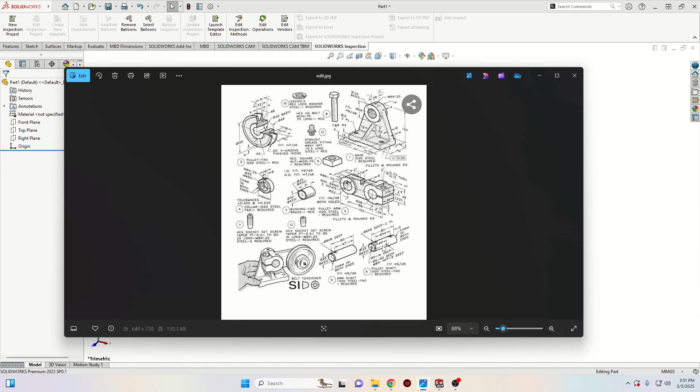Okay, so we'll have to open a new part and then open a sketch in the front plane. And here we'll make the next sketch. Select circle, we'll make one, select smart dimension, and let's define this. The diameter will be 25.

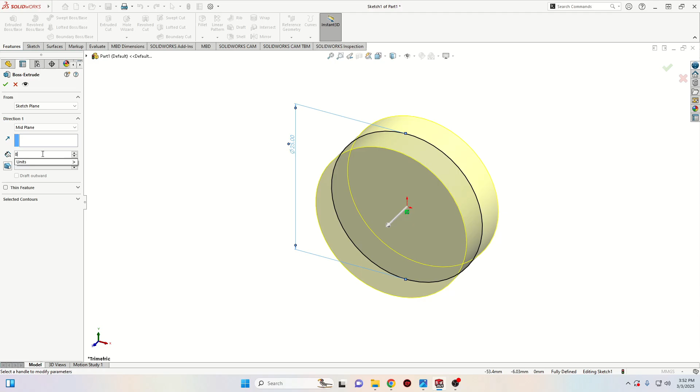And now go to features and use extruded boss base command. Here instead of blind we'll keep mid plane, and here the dimension will be 80 millimeters. Press here OK. Now we'll have to add some chamfers on both ends.

So go up here, select chamfer. You can select this face, and here we'll select this one, dimensions, and here we'll keep symmetric and the dimension will be 1 millimeter. Press here OK.

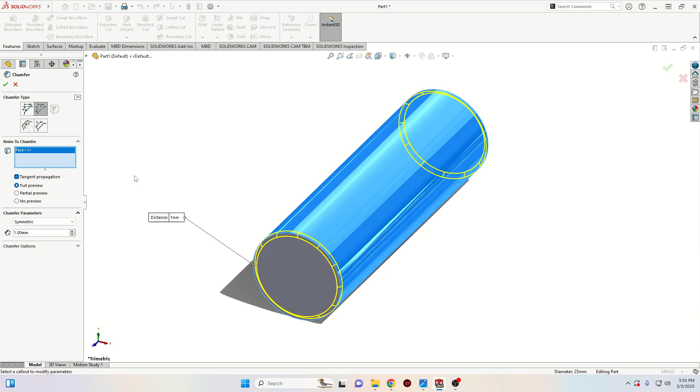And now select hole wizard. We'll have to make 4 holes for this shaft. Select here this one and here this, and then we'll select here tap drills, and the first hole will be M8 with the pitch 1. In this hole will be going the grease nipple.

And now go to positions. Actually first let's change here the end condition. Will not be through all, will be blind, and here will be 50 millimeters. Alright, and now we're gonna leave it like this. Make sure that this is not checked here.

Okay, and go to positions, 3D sketch. Let's place it on this face. Now we have to make sure that this is fully defined. First let's try like this. Select this point with this center point, and let's see if we can make them along Z axis, and this should fully define it. Now it's black, which means it's good.

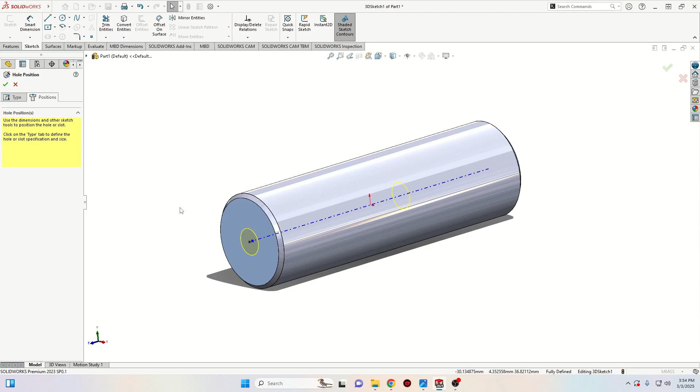Press OK. And now we have the first hole, and now let's make the thread for this hole. So we'll go back to hole wizard, select thread, press OK. The thread location will be this edge, and now let's select, here will be blind, the distance will be 8 millimeters. Okay, and now here we'll keep M8 and the pitch will be 1.

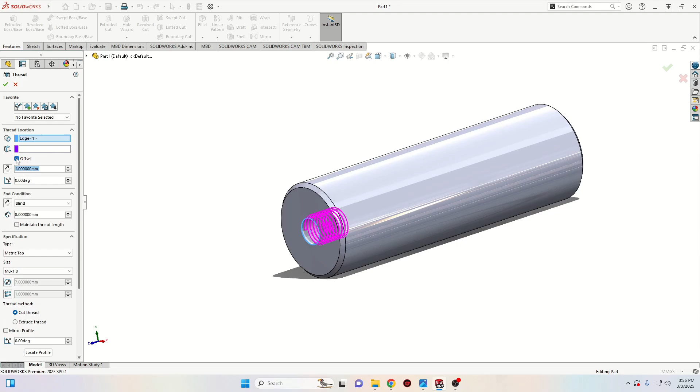Now let's select here an offset. So select here offset. We'll select here 1 millimeter. We'll change here the direction of the offset. We want it to be outside of this face. And I'll have to change here from 8 to 9.

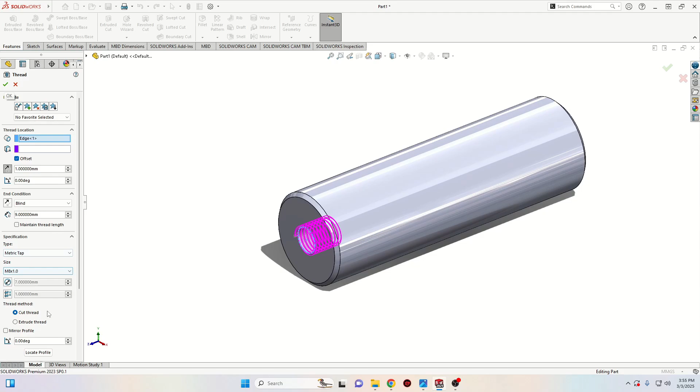And now we have 8 millimeters of thread inside this shaft. And let's press here OK. This should be all the settings. Yes, that's good. Press here OK.

Okay, and now let's select hole wizard again, and this time we'll select also this right here, but here will be drill size, and let's select here the size will be 8. So scroll down until you'll find 8 millimeters in diameter. And now here we'll also keep blind, but this time the depth will be 5 millimeters.

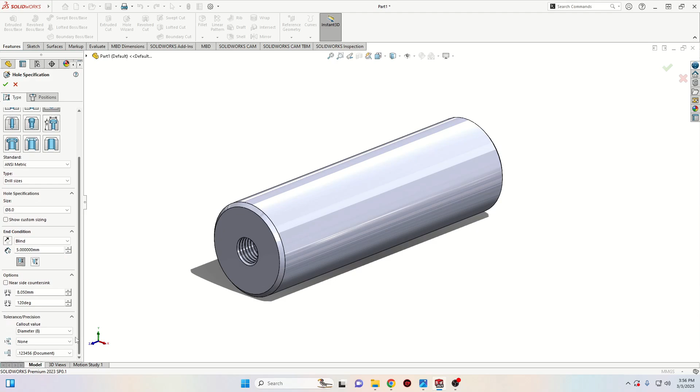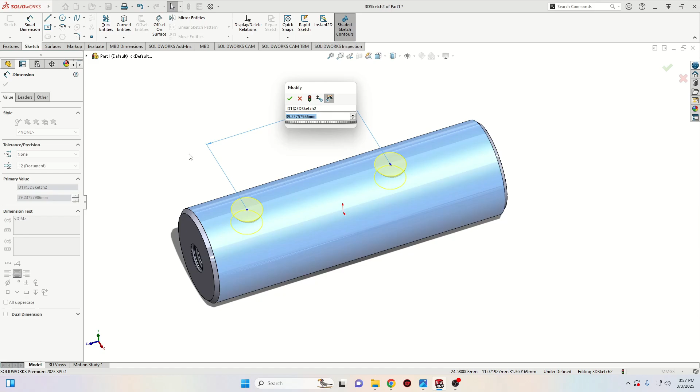Go to positions, select here 3D sketch, and this time we'll have to place 2 of them like this. And now let's define them. We'll have to give some dimensions. So select smart dimension and let's give a dimension in between these two. Here will be 54 millimeters. Okay.

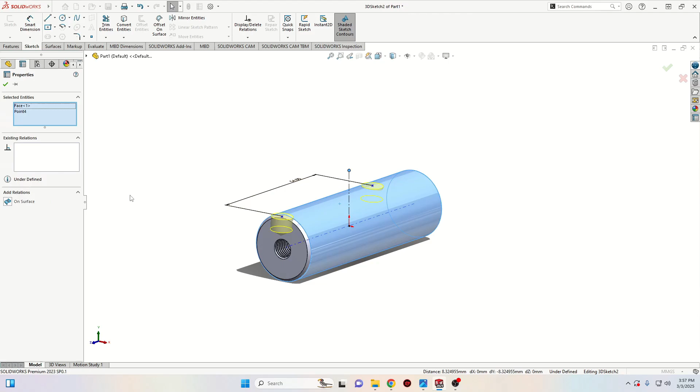Let's make sure that these two are in line. So select both of them and select here along Z-axis. Press here OK. And now let's try to give another dimension, and let's select center line. Let's make a center line going up like this, and then select this point with this face and select here on the left on surface.

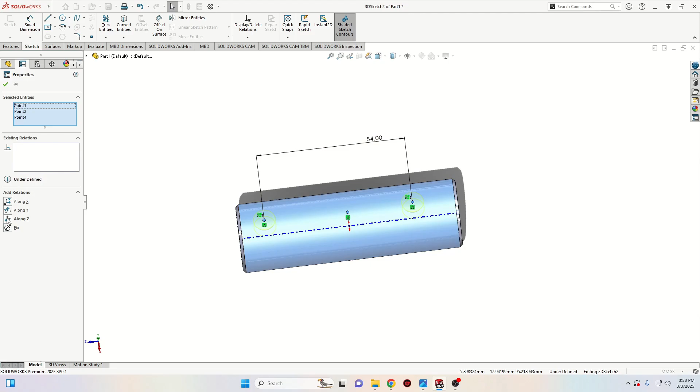And now all of these 3 points should be on the same direction, on the same line or not. If they are not, let's select them all, only the points, and select here make along Z-axis. Okay, that's better. And now it's smart dimension. Let's give a dimension from this point to this one, and here should be half of this dimension, so 27.

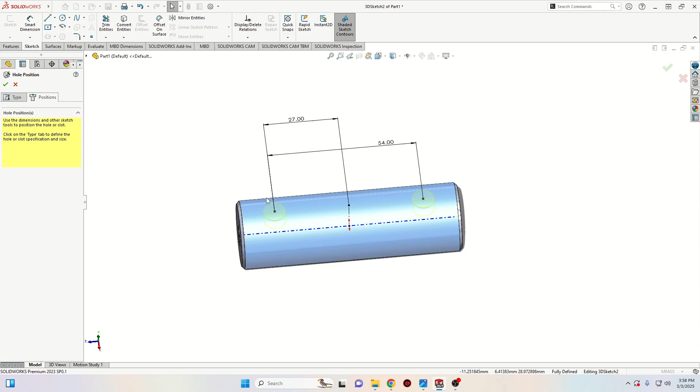Okay, and now this should be it. Press here OK. And I'll have to make one more hole, which will be somewhere on this side. So select hole wizard again. We're gonna use also this.

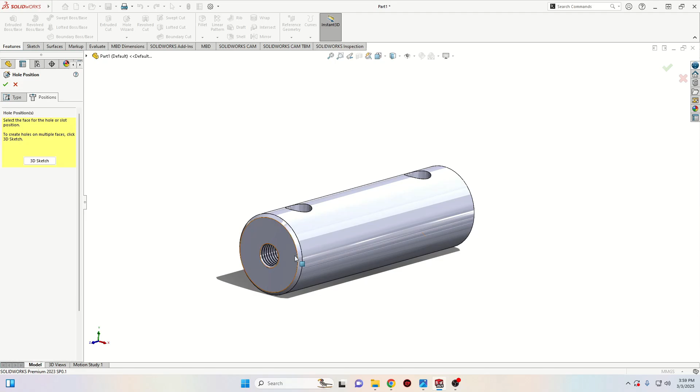We'll keep all of them like this, and here we'll have to change the diameter, and this time will be 5 millimeters. Let's go and find 5. Perfect. Everything else will be the same. Go to position and select here 3D sketch. Let's place it like this.

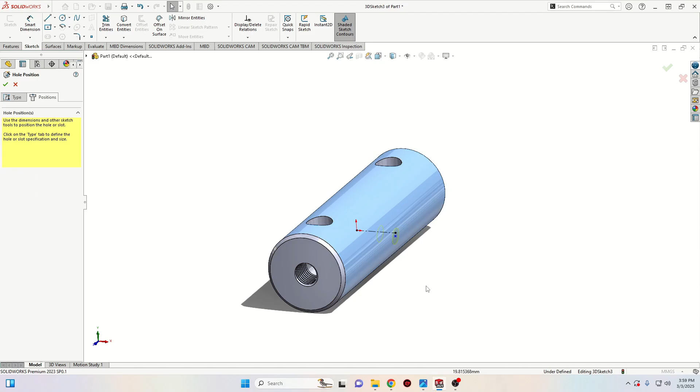And now let's make another center line. And we'll start another center line like this. Make it along X-axis this time. Select this point with this face and select again on surface. On the drawing we see that this hole should be at 40 millimeters from this face. This whole shaft has 80 millimeters, so it means that it's in the middle.

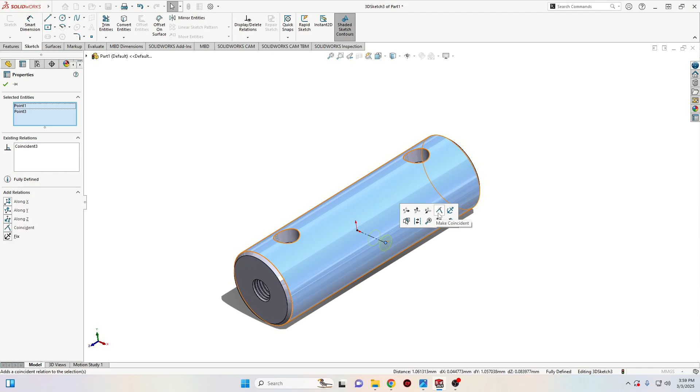Okay, if we know that, we can select this point with this point and select here coincident. And now the depth for this, let's go back here to type. We forgot to change the depth, should be 14 millimeters. That's good, and press OK. This hole is for lubrication, so it's good. Nice, and this is everything for this shaft.

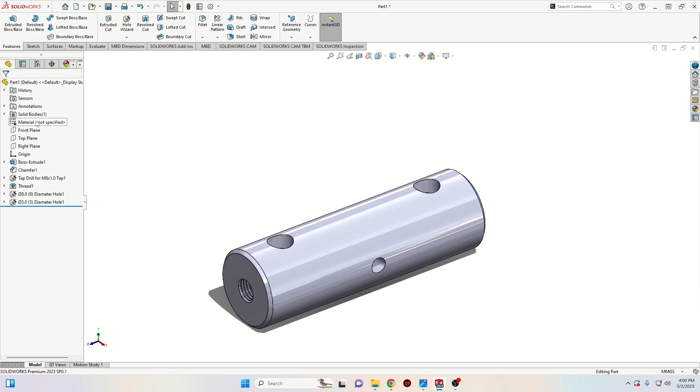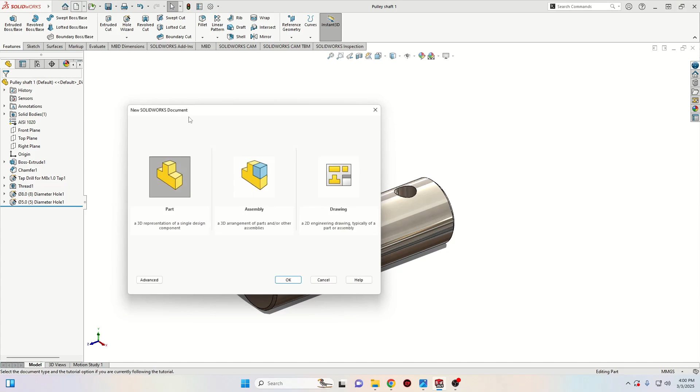Let's apply the material. It will be edit material. It will be steel 1020. Apply and close. Now let's save this. This will be the pulley shaft. Okay, now let's open a new part and let's make the next shaft, which will be the arm shaft. This one will be a little bit faster because it doesn't have so many holes.

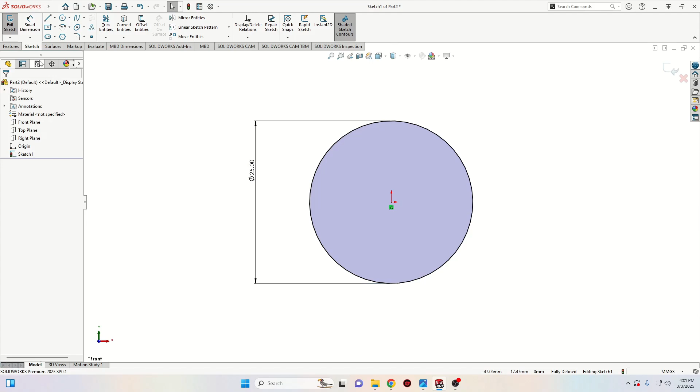Let's open again a sketch in the front plane, select circle. It will be the exact same dimensions as the other one, 25. Let's go features, extruded boss base, also mid plane, and here will be the same, 80. Press here OK. And now again a chamfer, dimension, symmetric, 1, press OK. Let's apply the material. Apply, close. Okay, and now we'll have to make only one hole for this one.

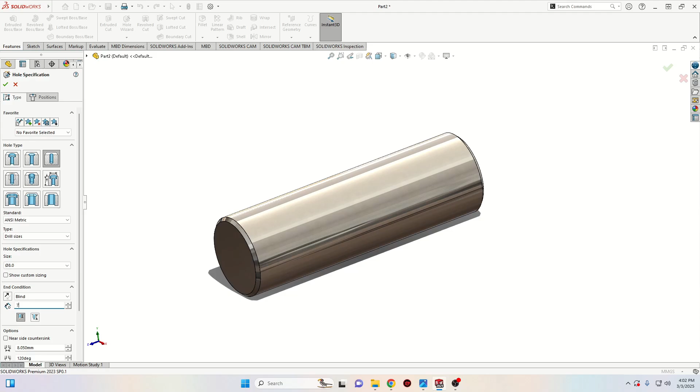So go to hole wizard. We'll keep the same settings right here, and we'll have to change here from diameter 6 to 8. 8. And the depth will be also 8. Go to positions, 3D sketch. We'll have to place it right here. And now let's make a center line. So select center line, make it like this along y-axis. Select this point with this face, select here on surface. Make these two along z-axis.

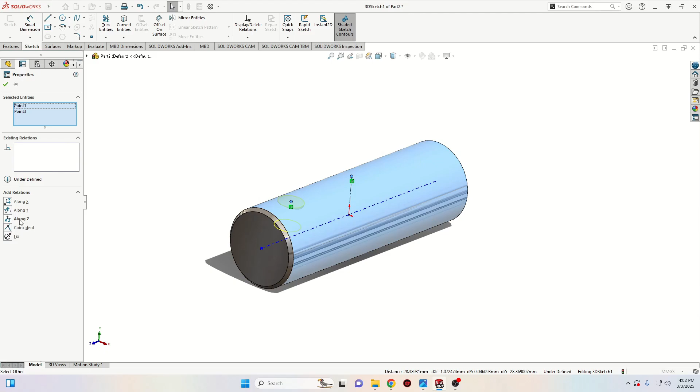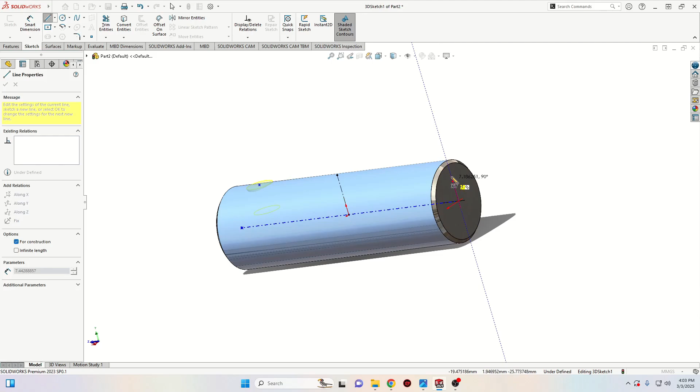Okay, and now with smart dimension, I'll have to give a dimension which will be from this. Let's see if it's working. We have a dimension from this point to this face, to this end right here. Is not working. Okay, if we want to give this dimension according to the drawing, we can try to make a center line right here, and then select this point with this face and select again on surface, and we can give the dimension this time in between these 2 points, and it will be 67.

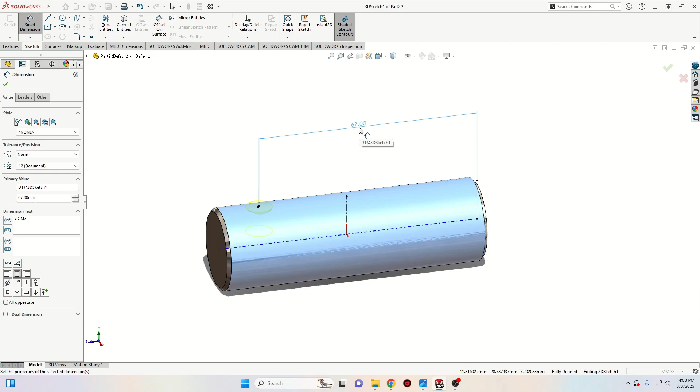Or we know that from this face to this center line is 40 millimeters, so we can add the extra millimeters to make it 67, which is 27, right? So we can give a dimension from this point to this point, 27. It will be the same. Nice, and now press here OK. And this is everything for this shaft. Let's go ahead and save it. This will be the arm shaft.

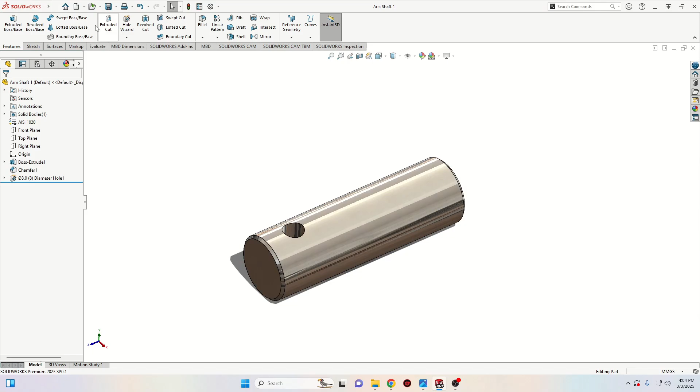Save. And I'll have to make the last 2 parts. So let's open a new part. All of these are very, very easy. Let's open a sketch in the front plane, and here we'll make 2 circles. And now with smart dimension, let's define them. This one will have the diameter 44.

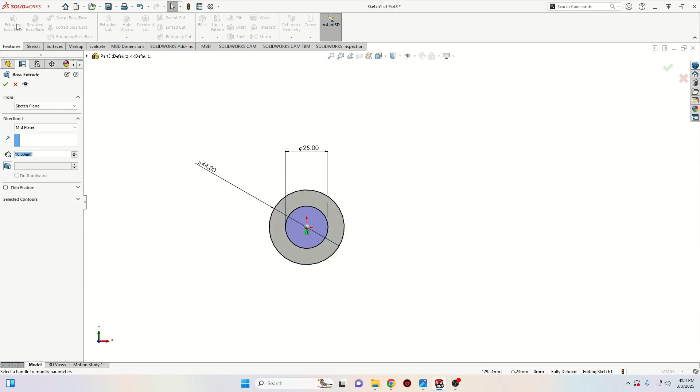This one will have the diameter 25. Go to features, use the extruded boss base command. We'll keep mid plane here, and this will be 16 millimeters. Press OK.

I'll have to apply a chamfer for this one also. So go to chamfer, select this face, select this, and set it to 1 millimeter. Press OK.

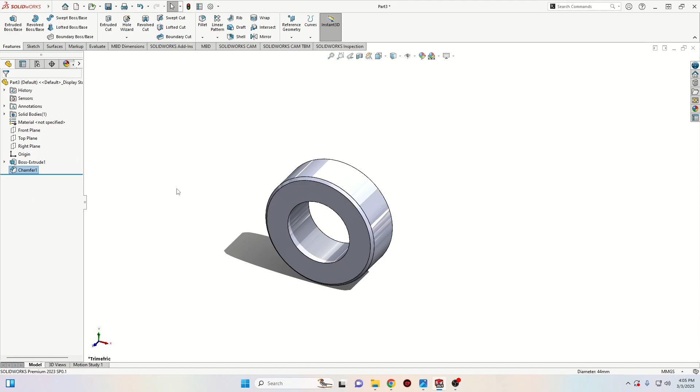Now I'll have to make a hole, so go back to hole wizard. We'll keep this one - the hole will be M8 with pitch 1.25. We'll have to change here to tap drill, and find M8 with pitch 1.25.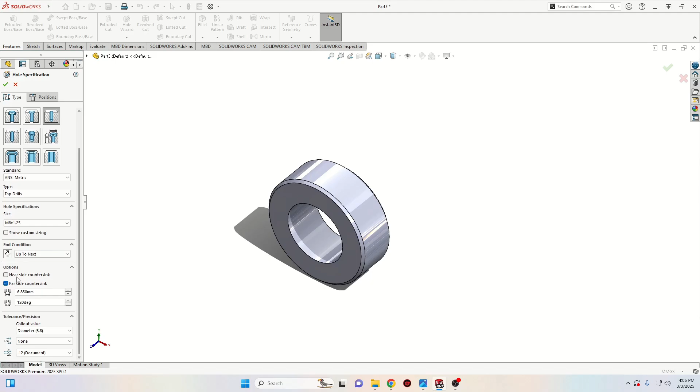Go to positions - actually, first let's change the condition here. We'll change from blind to up to next, and let's uncheck this. Now go to positions, 3D sketch, let's place it like this.

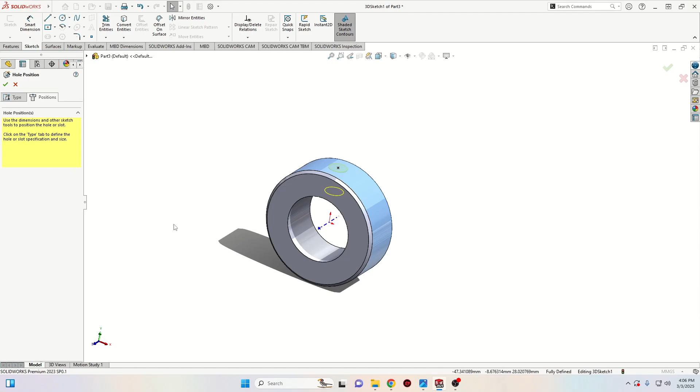On the drawing it's at 8 millimeters from this face right here, which means it's in the middle because this whole part has 16 millimeters. Let's see if we can select this point with this one and make them align along the y-axis - and it's working. Now this is fully defined.

Go here and select OK. Now let's apply also the material for this. This will be steel 1020. Apply and close.

Now this is it for this part. Let's save it.

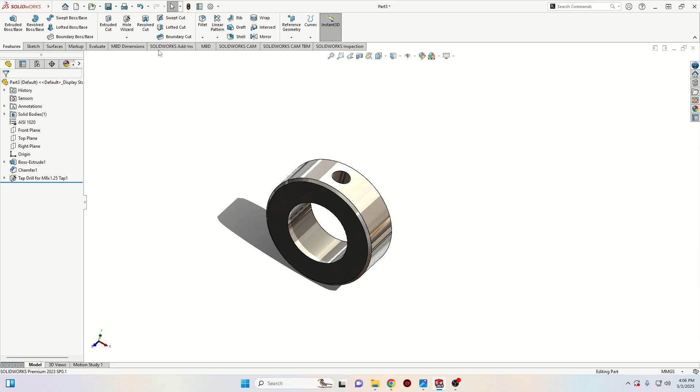Let's make the last part, which is the bushing. We'll have to open a new part, plain white. Open a sketch in the front plane, and again it will be the same two circles.

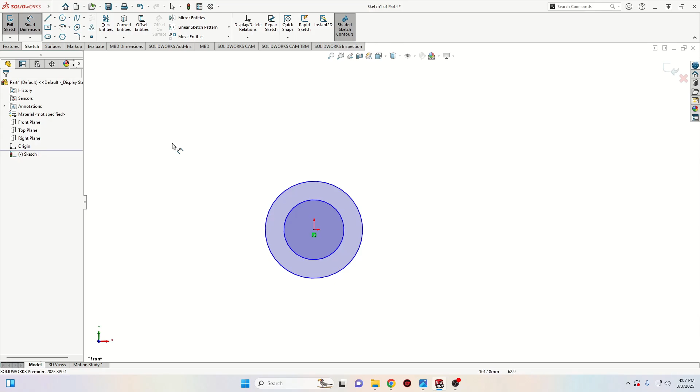This time we'll have other dimensions, at least this one. This one will be 30 millimeters, and this one will be 25.

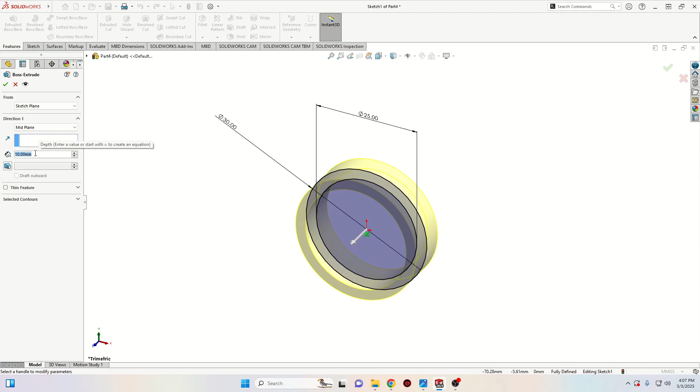Go to features, use extruded boss base command, and this - I think it has 10 millimeters because the drawing is not very clear. Press OK. Now this one is from brass, so right click, edit material.

We'll have to find it, I am not quite sure where it is. It's definitely not here, so I think it's here, yeah. We have to go to copper alloys and select brass from here. Apply and close.

Now this is the bushing. Let's save it. Save. And these are all the parts we need for this assembly.

This is the tutorial for today, and in the next one we'll start the assembly, and for that we'll have to import some of the parts. For example, I'm gonna show you now which ones.

Go to toolbox, select add-in now, and one of the parts is this one, the lock washer. We can see here that it's 12, 21 and 2.5.

We cannot find it here, so in the metric thing here there's no washer like that one. We only have ones like this with teeth.

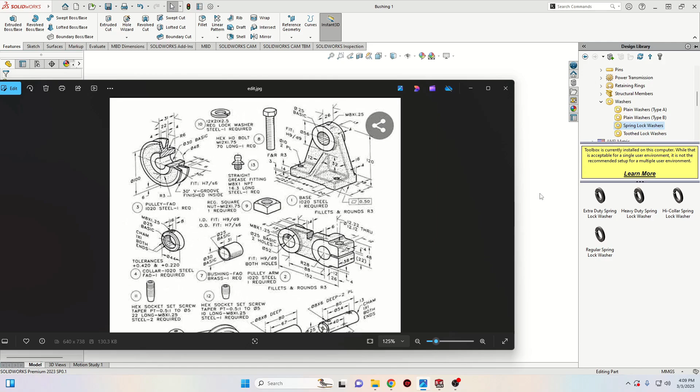Now we'll have to also import some hex socket set screws, which are these two. We'll go to metric, then bolts and screws, and we have here set screws socket, and we'll use this one from here. Again, we have some information here about them, but we cannot find the exact same thing here.

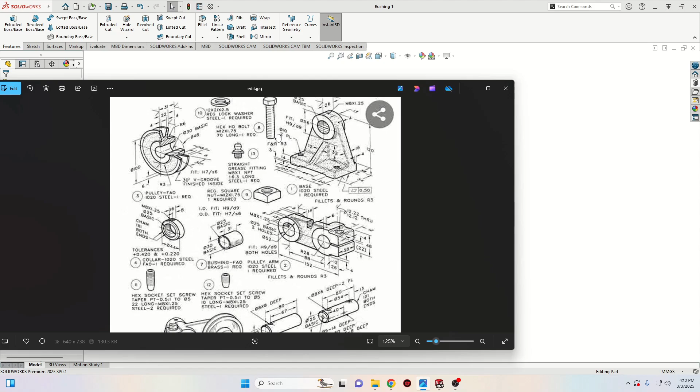And the last one will be this bolt - this is very easy. We can find it here at hex head, and we're gonna take this one and just select the size. Okay, so this was the tutorial for today.